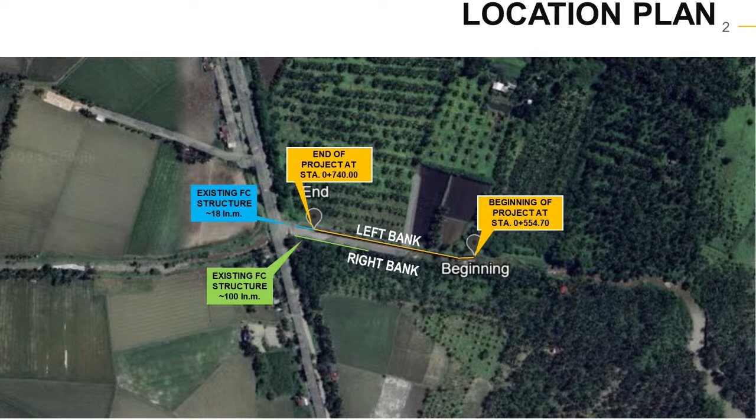This is the location plan. The project, shown as the yellow line, connects to the existing flood control structure on the left bank, so it's only one side of the project. For the scope of works, this is a construction of concrete revetment with sheet piles having a length of 4 meters - a single berm concrete revetment.

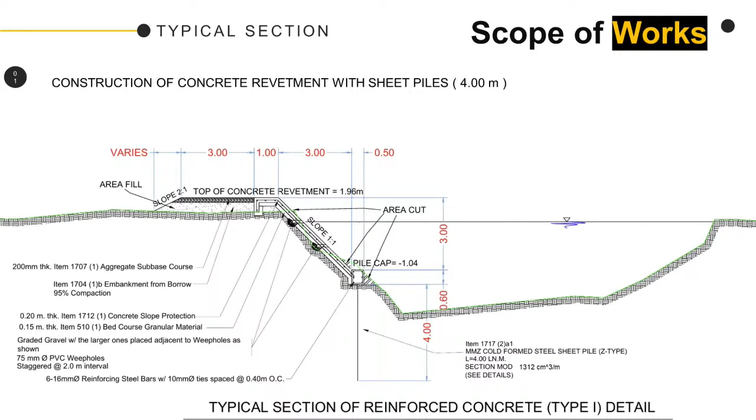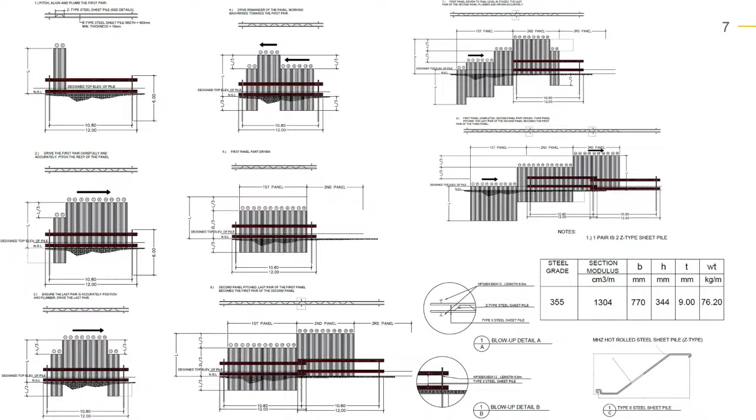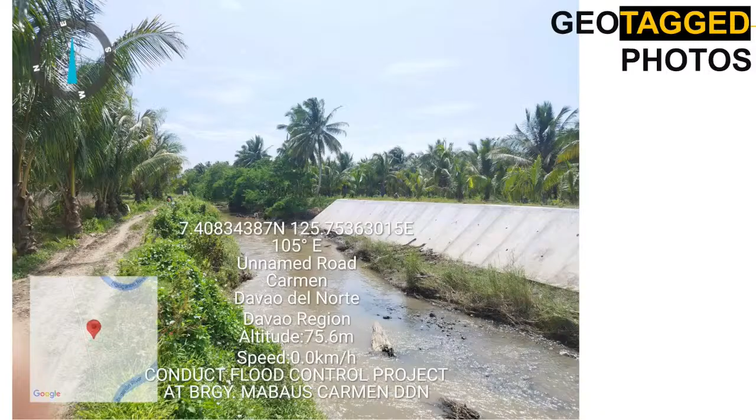These are the supplemental details of the project: the cofferdam details and the sheet pile driving method. And these are the site photos. That would conclude my presentation, thank you for listening.

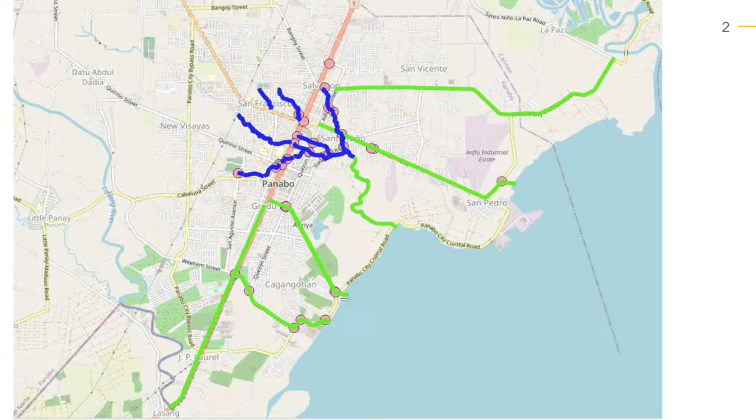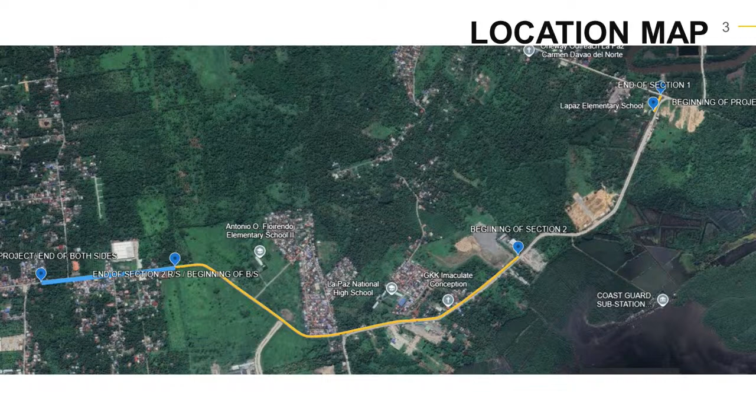This shows the proposed outfall in Panabo. This project is at the highest point, nearest to Carmen, near San Vicente, where it drains to the Lasang River. This is the location map - Section 1 is near the Lasang River, connecting to the existing project in the region. Section 2 connects to the end of the region's project, then proceeds directly to downtown Salvacion, Panabo. This is Section 1, and this is Section 2.

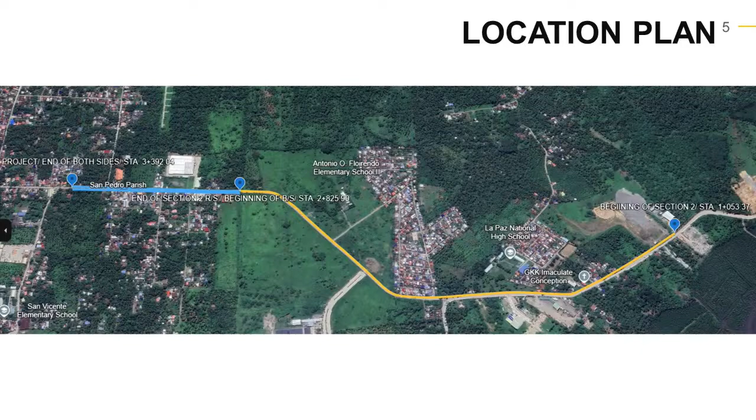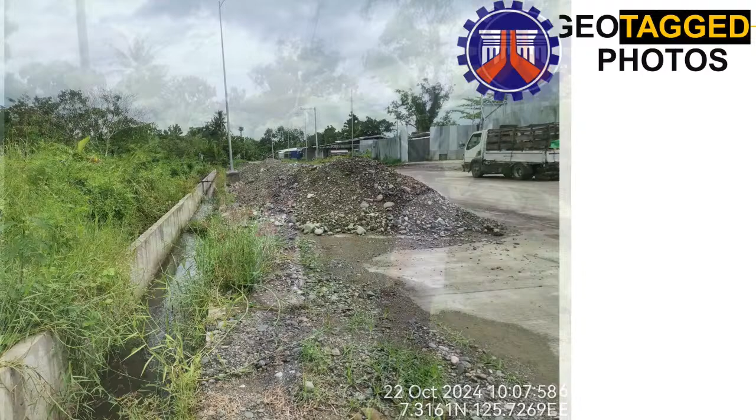Scope of works: construction of single barrel box culvert, construction of lined canal. These are the details of our canal and the details of our box culvert. These are the geotag photos. End of presentation.

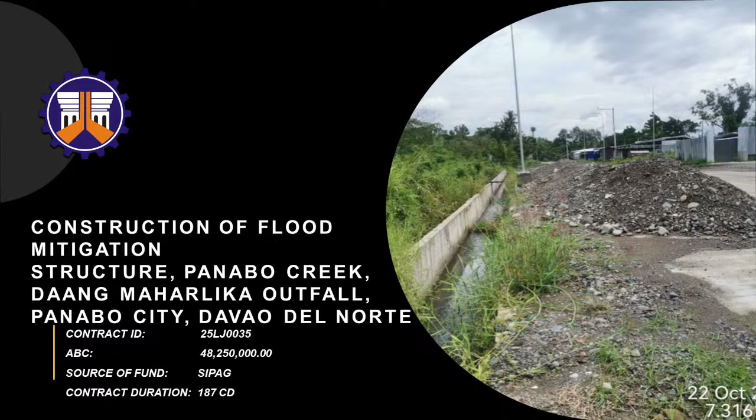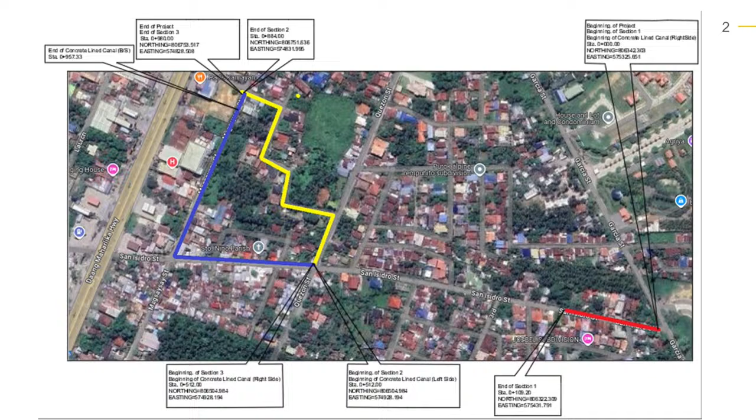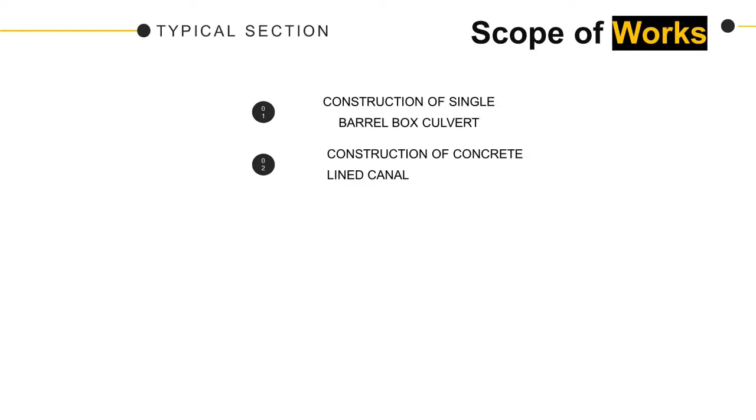Construction of drainage structure, Barangay New Pandan, Panabo City, Davao del Norte, with contract ID 25LJ0036, ABC of 12,870,000 pesos, source of funds CY 2025 BIP, contract duration 163 calendar days. This is the location plan - the red line is Section 1, the yellow is Section 2, and the blue is Section 3. Scope of works: construction of single barrel box culvert, construction of concrete lined canal. These are the typical drainage sections of our project, the details of our box culvert and canal, and these are the geotag photos. End of presentation.

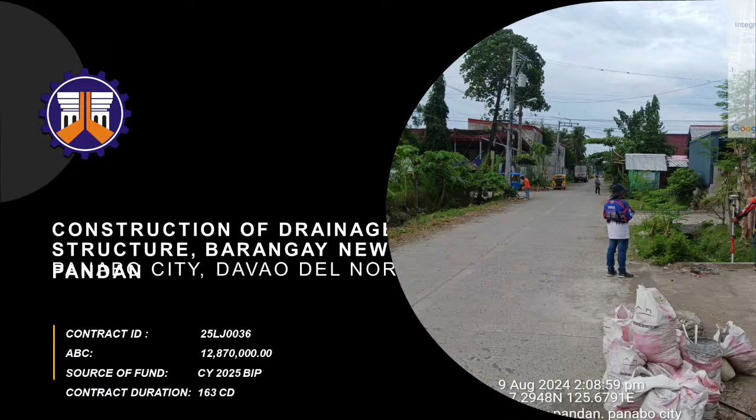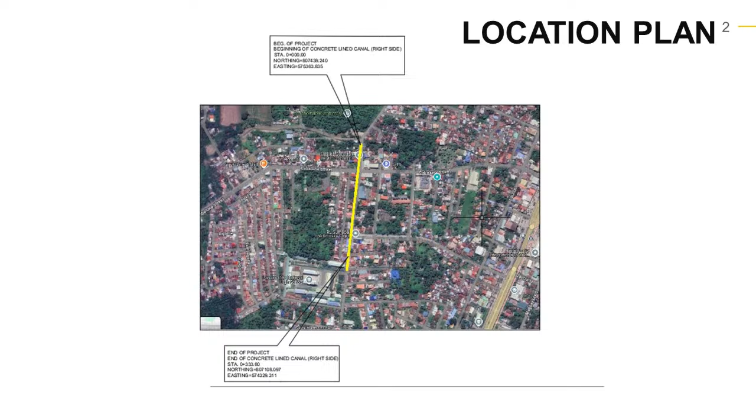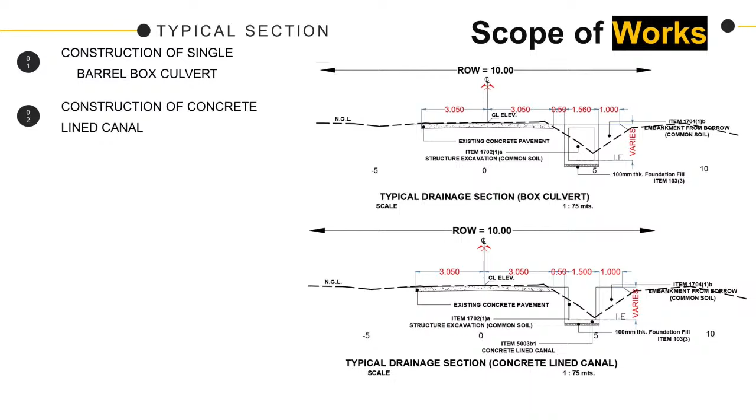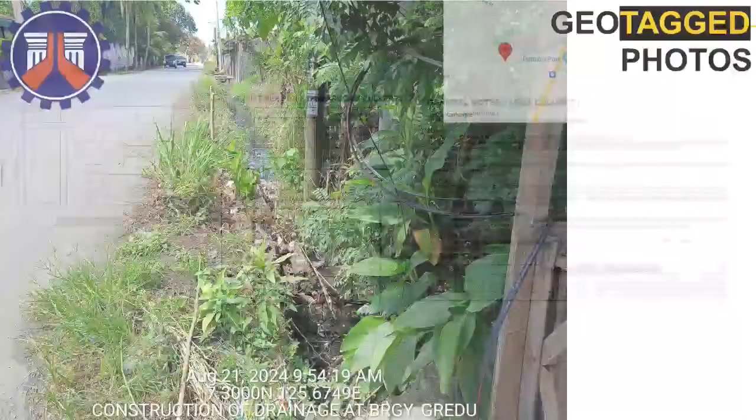Construction of drainage structure, Barangay Gredu, Panabo City, Davao del Norte, with contract ID 25LJ0037, ABC of 6,930,000 pesos, source of funds CY 2025 BIP, contract duration 117 calendar days. This is the location plan. The beginning connects to Kabaluna Creek, our main outfall, where we drain the water instead of it going to the Maharlika drainage, then it proceeds near Panabo National High School. Scope of works: construction of single barrel box culvert, construction of concrete lined canal. These are the typical drainage sections, the details of our canal and box culvert, and these are the geotag photos. End of presentation.

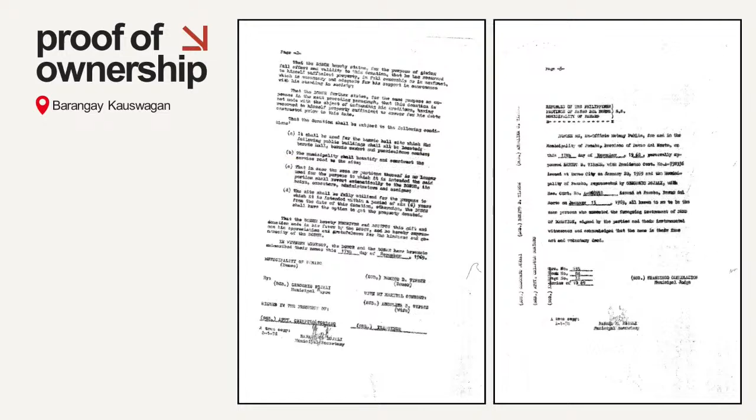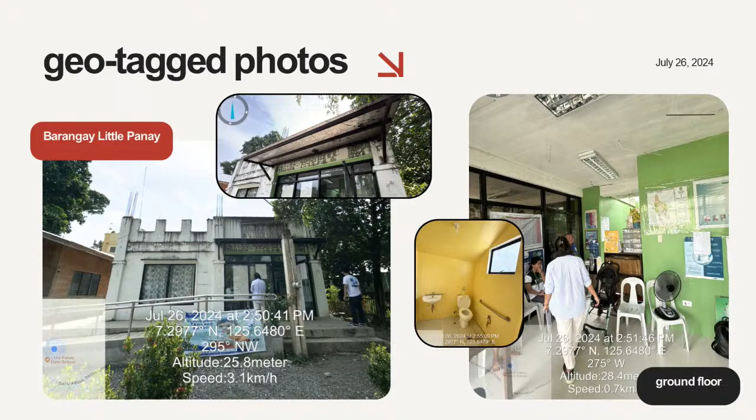This is the project location for Barangay Little Panay, for Barangay Kauswagan, and Barangay Katualan. Proof of ownership for Barangay Little Panay and for Barangay Kauswagan. Site validation sheet for Barangay Little Panay signed by the Barangay Chairman and Barangay Kagawad, for Barangay Kauswagan signed by the Barangay Chairman, and for Barangay Katualan signed by Barangay Kagawad. Geotag photos for Barangay Little Panay, for Barangay Kauswagan, and Barangay Katualan.

Scope of works for Barangay Little Panay includes tile works, installation of railings, panel door replacement, painting works, installation of window grills, ceiling installation, completion of second floor, and with air conditioning system and fire extinguishers.

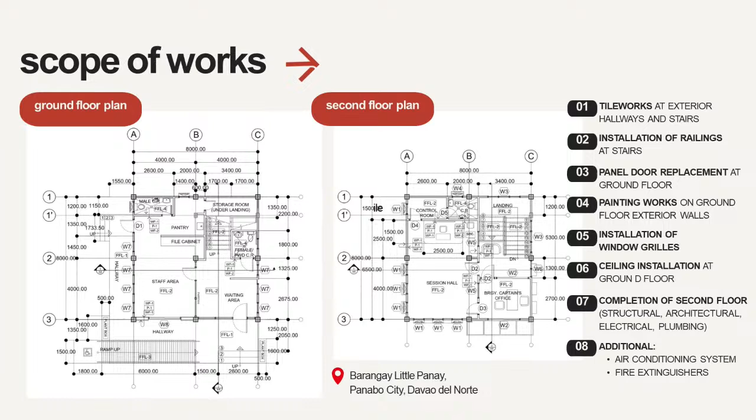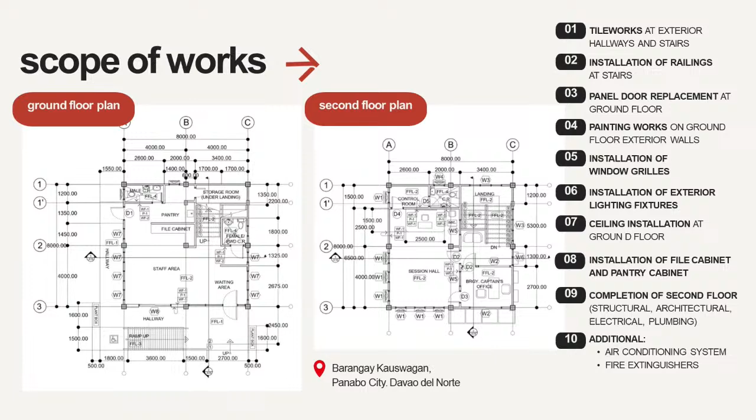Elevations and perspective. For Barangay Kauswagan, we have tile works, installation of railings, panel door replacement, painting works, installation of window grills, installation of exterior lighting fixtures, ceiling installation, installation of file cabinet and pantry cabinet, completion of second floor, and with air conditioning system and fire extinguishers.

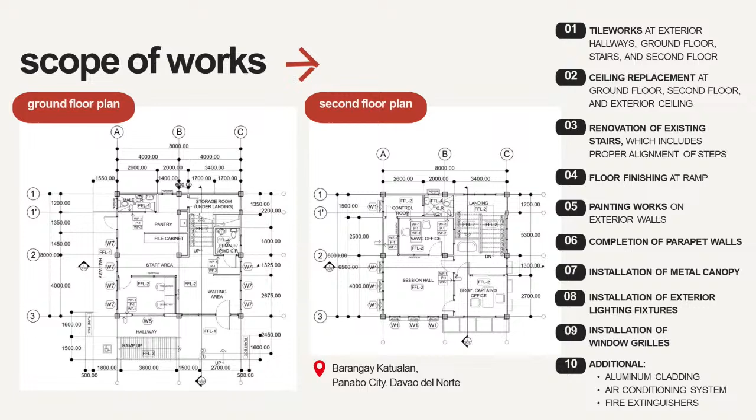So we have the elevations and perspective. For Barangay Katualan, we have tile works, ceiling replacement, renovation of existing stairs, floor finishing at ramp, painting works, completion of parapet walls, installation of metal canopy, installation of exterior lighting fixtures, installation of window grills, and with aluminum cladding, air conditioning system, and fire extinguishers. Elevations for Barangay Katualan and perspective. End of presentation.

Queries? Board members? Ma'am, let me go back to the project: construction completion of multipurpose building, Barangay Little Panay, Barangay Kauswagan, Barangay Katualan, Panabo City, Davao del Norte. Three locations, right? Yes, sir. Okay.

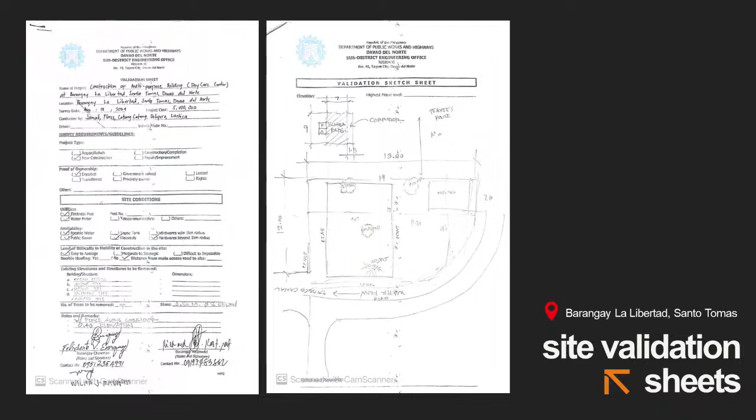The location for the daycare. Proof of ownership for Barangay La Libertad. Then we have the site validation sheet signed by Barangay Chairman and Barangay Kagawad. The photos.

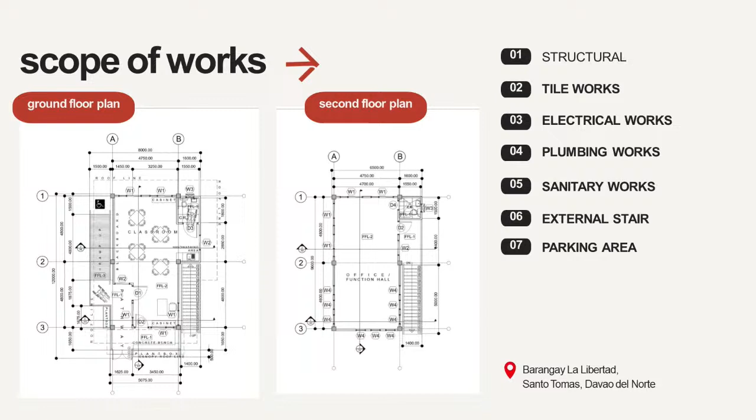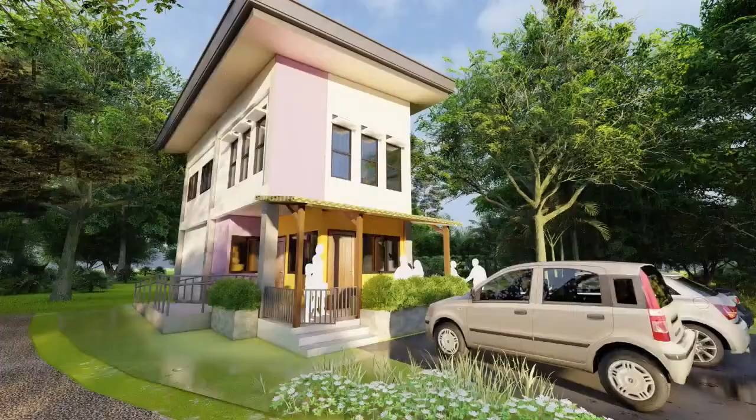Scope of work for the daycare center would be structural, tile works, electrical works, plumbing works, sanitary works, the external stair, and parking area. Site development plan for the daycare, elevations, and then perspective. End of presentation.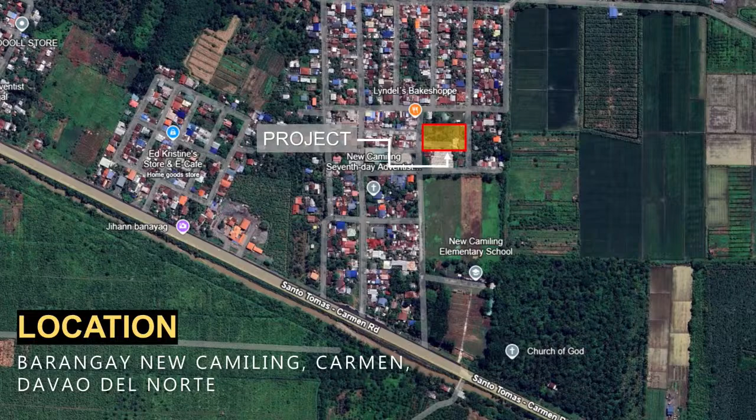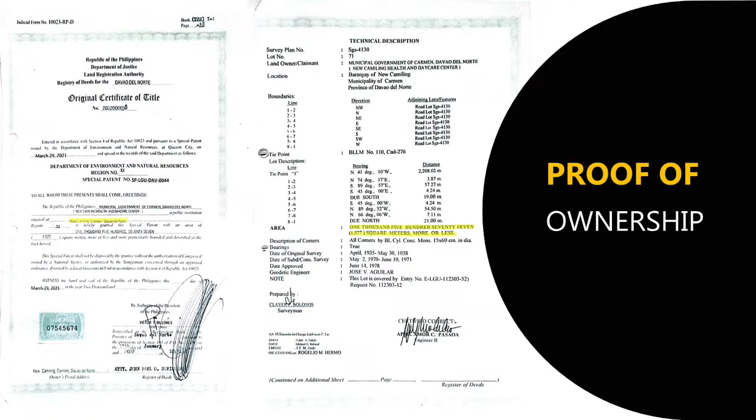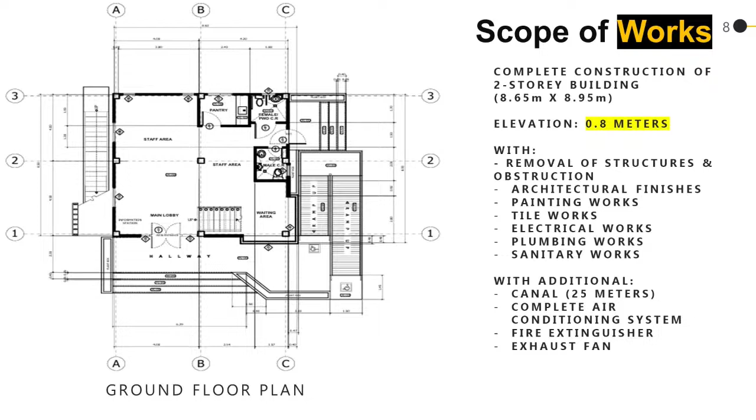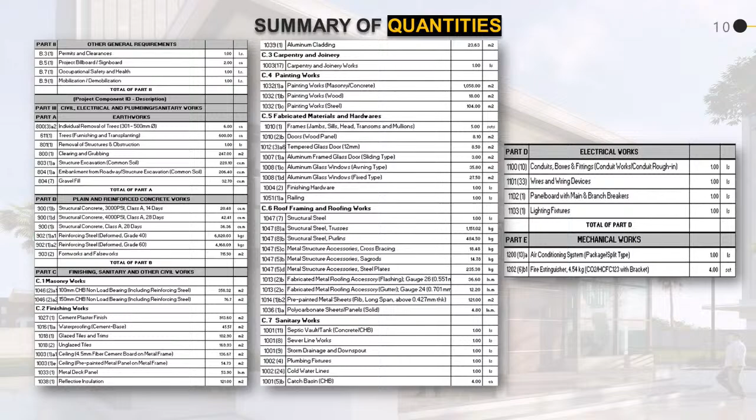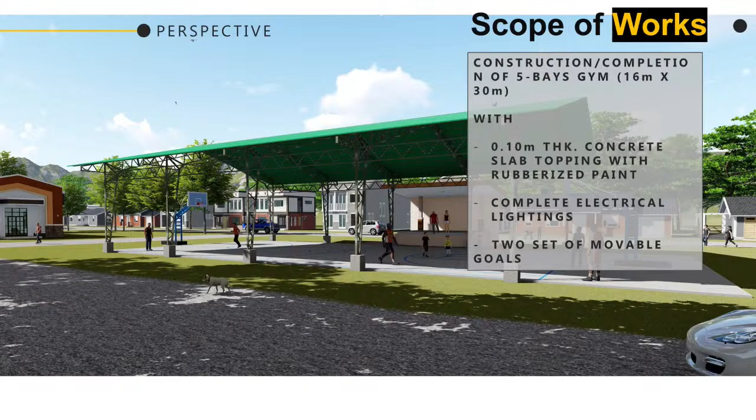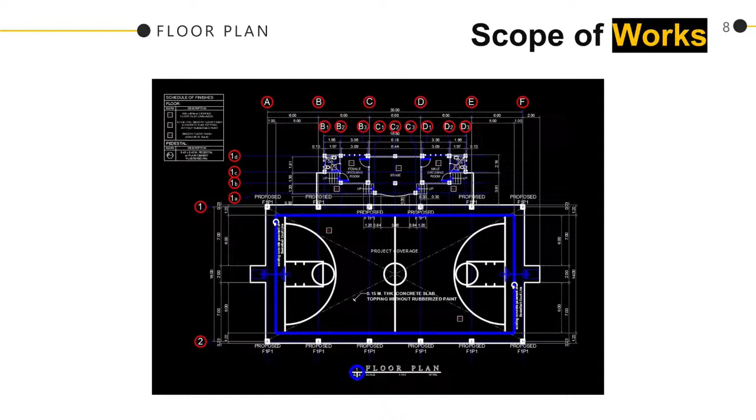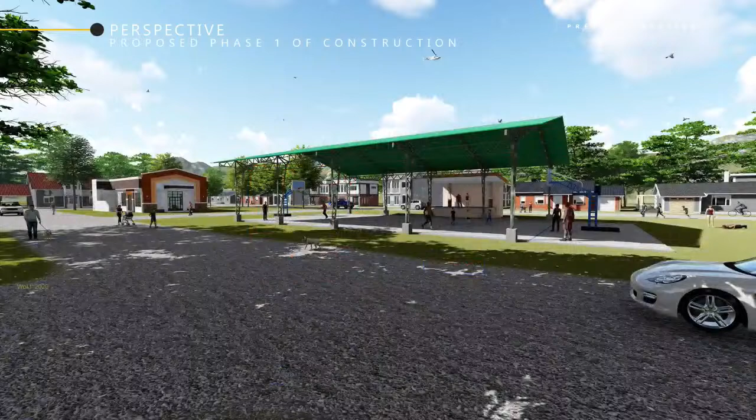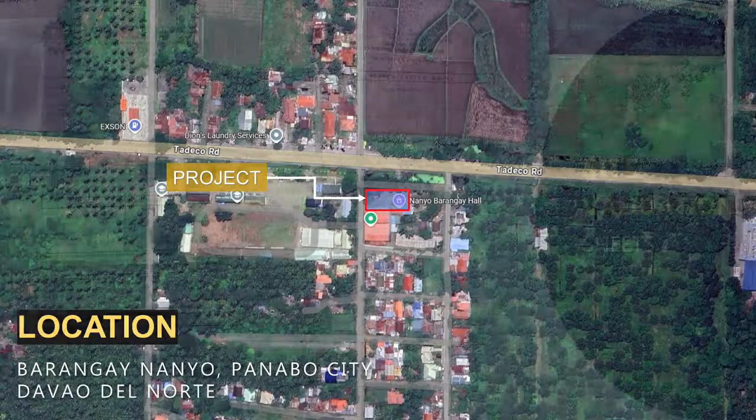Our project location, then our site validation sheets. For our proof of ownership, which is already under the name of Barangay Nanyo, and our geotag photos.

For our scope of works, we have a complete construction of a 2-story building with an elevation of 0.4 meters, with architectural finishes, painting works, tile, electrical, plumbing, and sanitary works, with an additional canal which has a 22 meters length, complete air conditioning system, fire extinguisher, and exhaust fans.

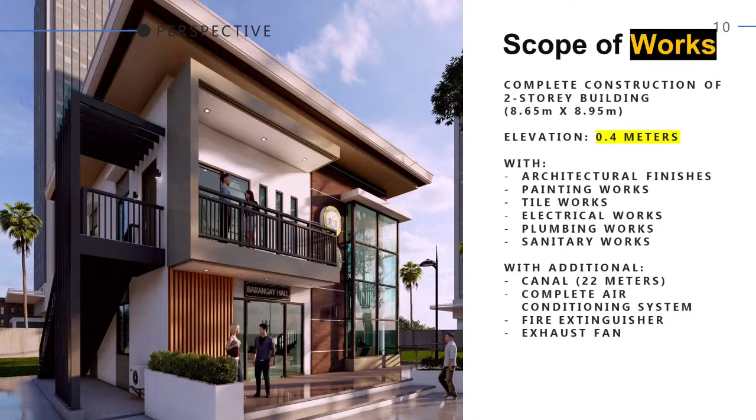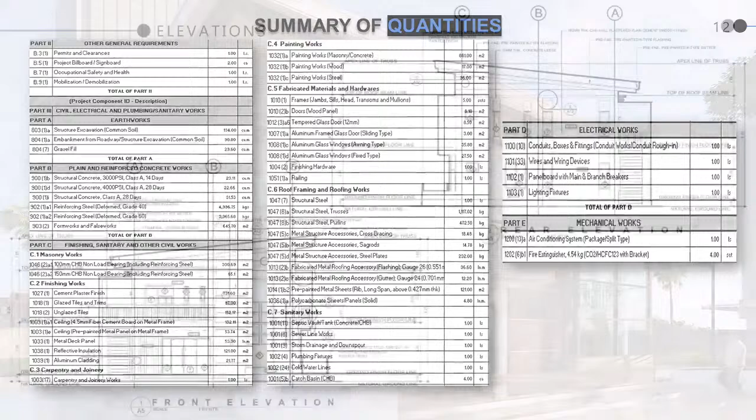Our floor plans for ground and second floor, summary of quantities, and our elevations. End of presentation, Mr. Chair.

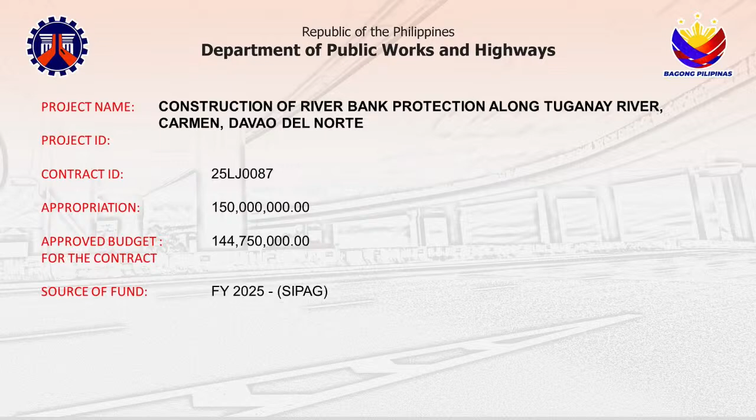Contract ID is 25LJ0087. Appropriation is 150 million. ABC is 144,750,000. Source of fund is FY 2025 SIPAG. The project duration is 320 calendar days.

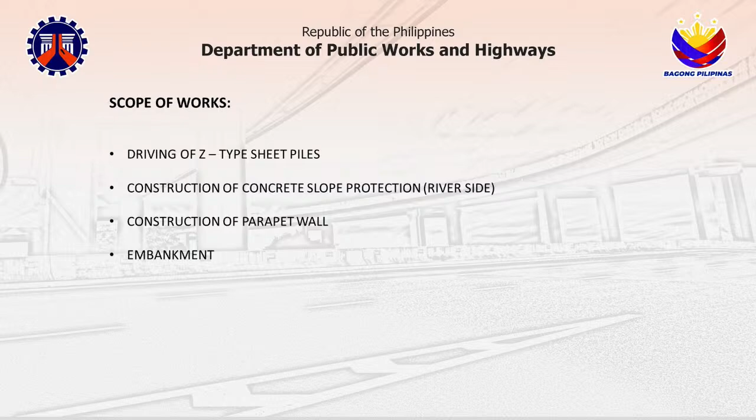Scope of works is driving of Z-type sheet piles 12 meters in length, construction of concrete slope protection on the riverside, and construction of parapet wall and embankment. The location of the project is downstream of Tuganay Bridge.

This is the alignment of the project. The beginning of the project is at station 0 plus 67.45. The end of the project is at station 1 plus 080.

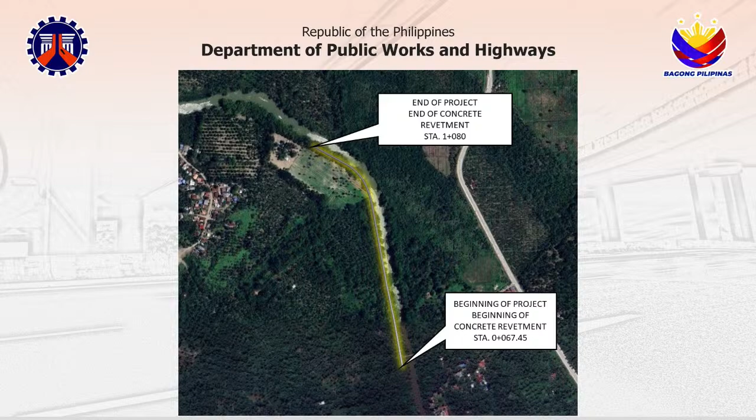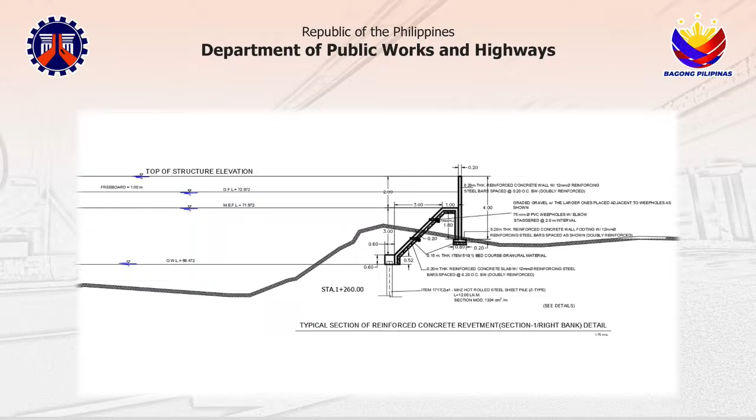The typical section of the project is this. The height of the structure: the first berm is 3 meters, then a 1 meter parapet wall.

Typical section, typical details for the pile cap and the sheet pile. The sheet pile is 12 meters, and the pile cap is 0.6 by 0.6.

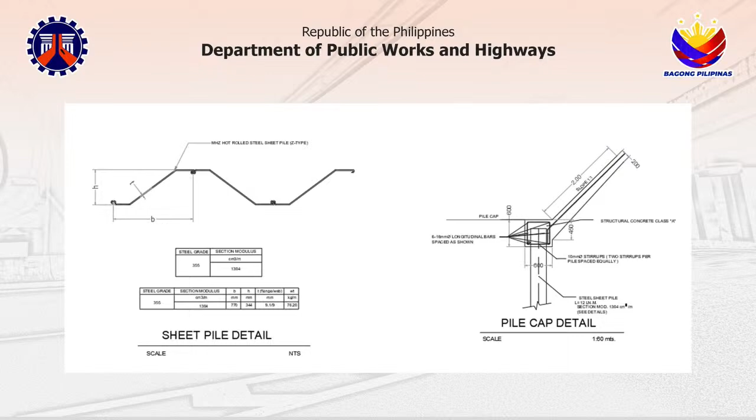And that's all for 25LJ0087. Sir, for the road right of way concern?

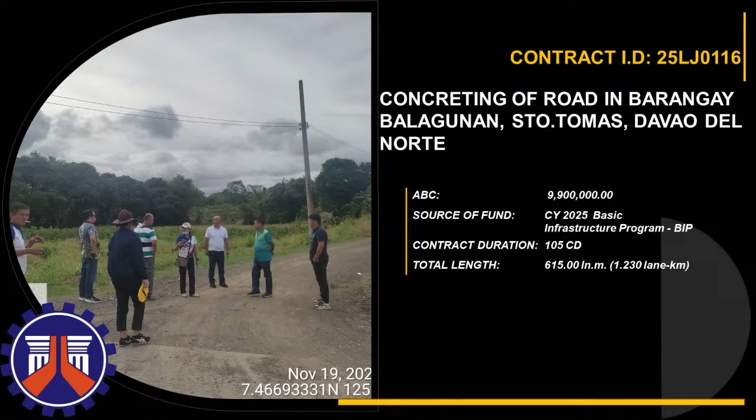Good morning, Mr. Chair. Good morning, everyone. I am Engineer Dave Agbon, presenting 25LJ0116, concreting of road in Barangay Balagunan, Santo Tomas, Davao del Norte, with an ABC of 9,900,000. Source of fund, CY 2025 Basic Infrastructure Program.

Contract duration is 105 calendar days. Total length, 615 linear meters or 1.230 lane kilometer. This is the project location.

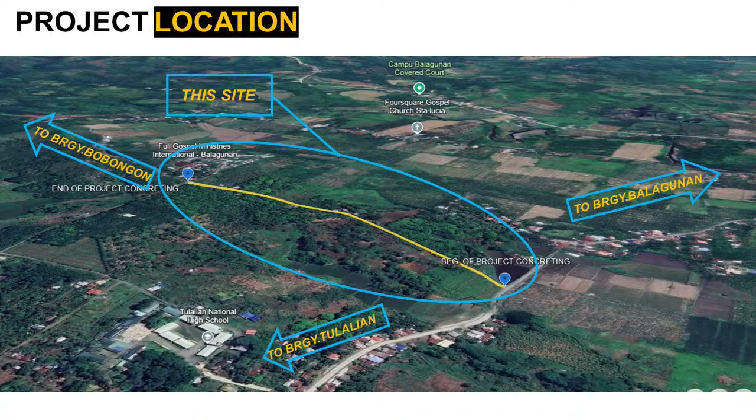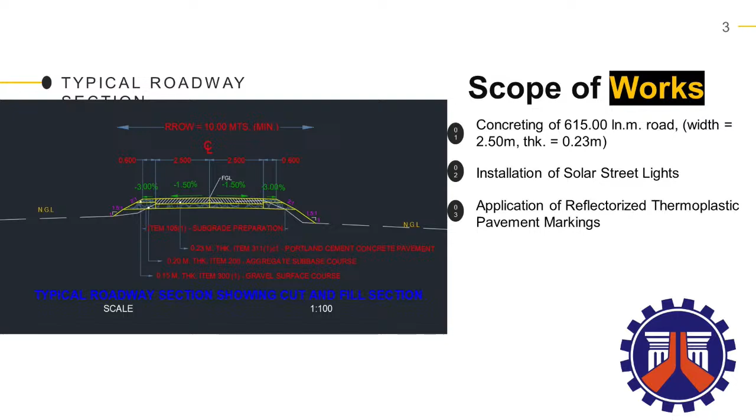Scope of works and typical roadway section showing cut and fill section. Concreting of 615 linear meter road with a width of 2.5 meters, thickness 0.23. Installation of solar street lights and application of reflectorized thermoplastic pavement markings.

These are the geotag photos. End of presentation. Okay. For the project number 12.

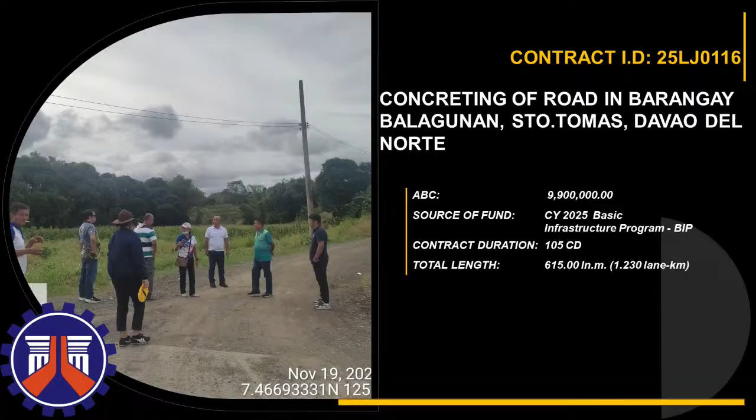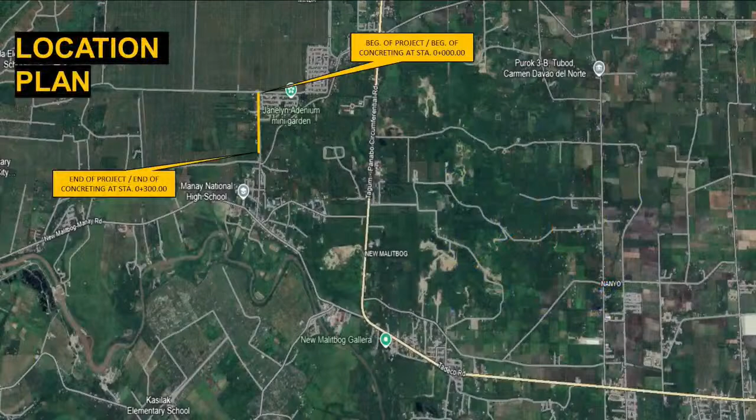Source of fund, CY 2025 BIP, 48 calendar days for the contract duration, and the total length of 300 linear meters. This is our location plan.

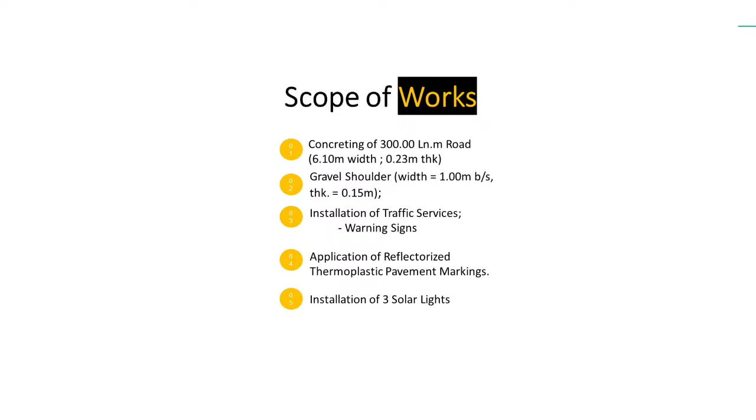Scope of works: concreting of 300 linear meter road, 6.10 width, 0.23 meters thickness, and a gravel shoulder of 1 meter width both sides, thickness 0.15, installation of traffic services, application of reflectorized thermoplastic pavement markings, and installation of 3 solar lights.

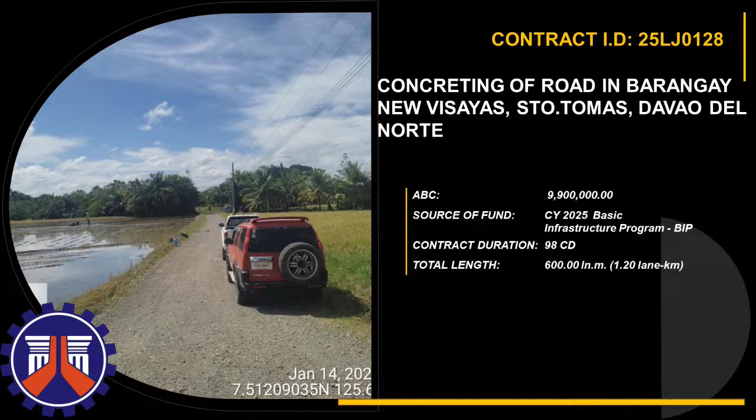Total length, 600 linear meters or 1.2 lane kilometer. This is the project location.

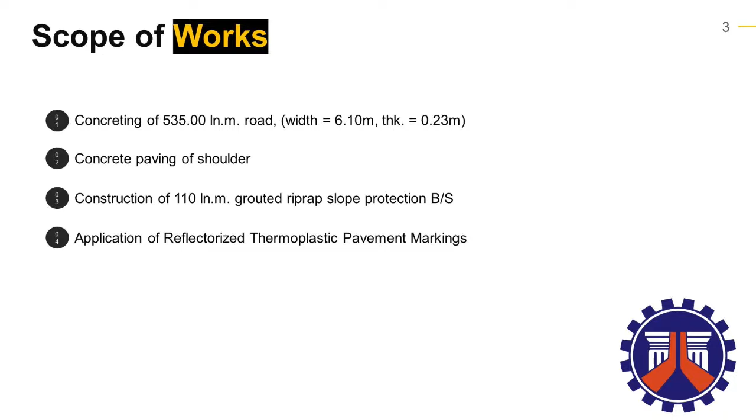Scope of works: concreting of 535 linear meter road with a width of 6.10 meters, thickness of 0.23 meters. Concrete paving of shoulder, construction of 110 linear meter grouted riprap slope protection both sides, and application of reflectorized thermoplastic pavement markings.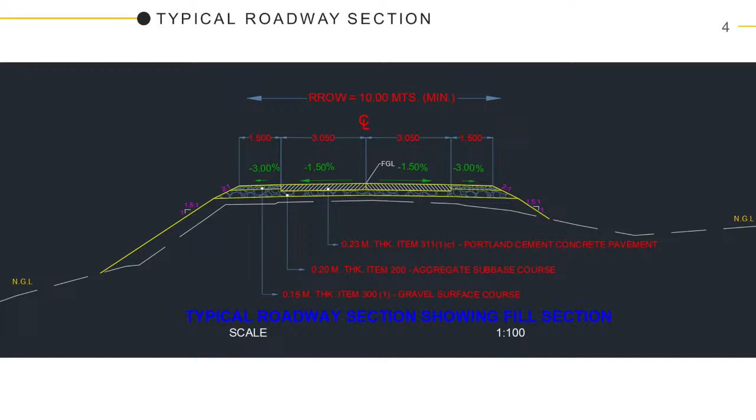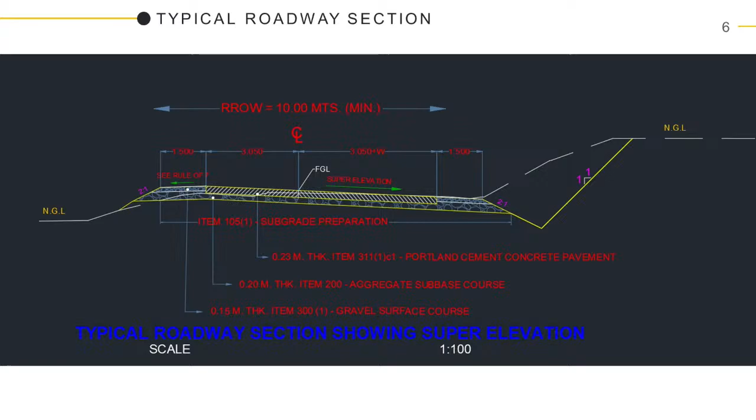This is the typical roadway section showing fill section, typical roadway section showing cut and fill with grouted riprap slope protection at both sides, and typical roadway section showing super elevation. These are the geotag photos.

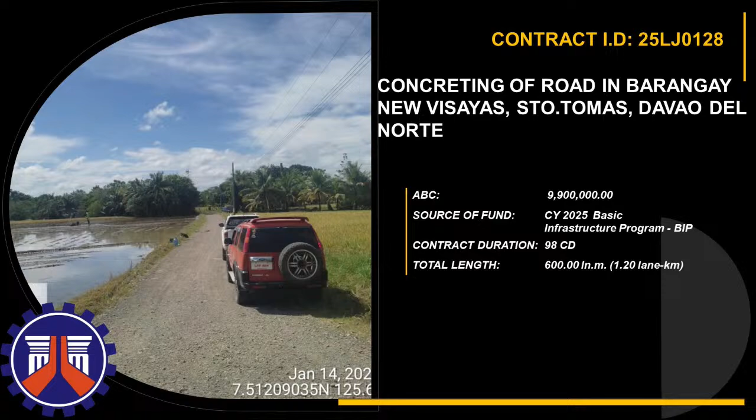This is the project location. Scope of works: concreting of 3,000 linear meter road with a width of 6.10 and it has a thickness of

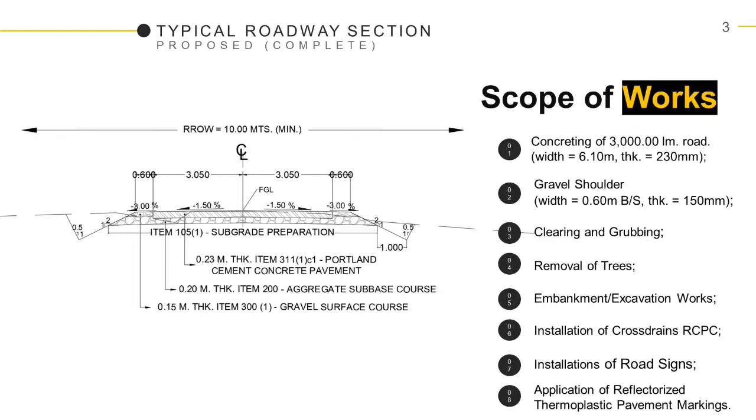230 mm. It has a gravel shoulder of 0.6 both sides, clearing and grubbing, removal of trees, embankment, excavation works, installation of cross drains, RCPC, installation of road signs, application of reflectorized thermoplastic pavement markings.

These are the geotag photos in Barangay Kinawitnon Road. End of presentation. Okay, thank you.